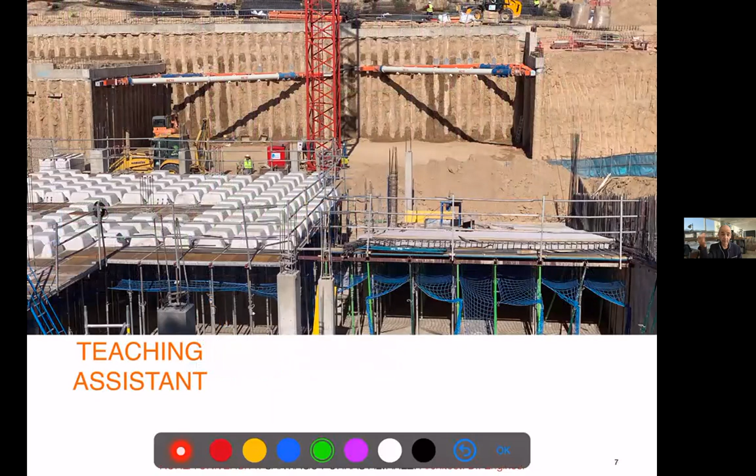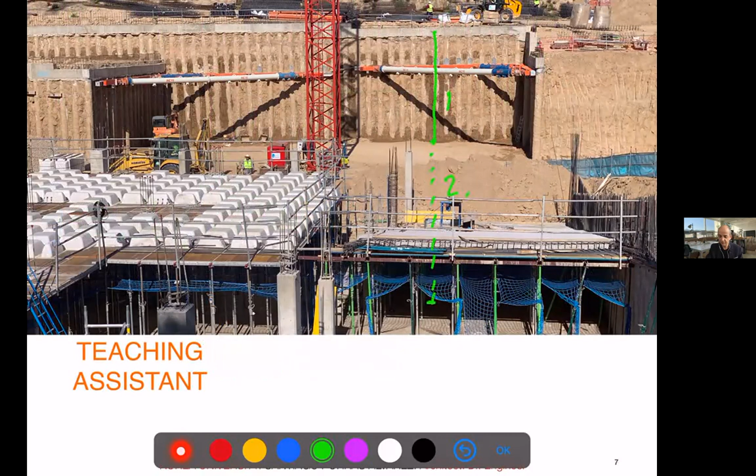Our teaching assistant on the photo shows a construction site in Madrid, which you see a set of piles, which probably go much further - probably it's like a 1:2 proportion, right, to support the excavation. And this is kind of a bracing in diagonal to support those walls during the excavation. And this is a waffle slab just being prepared.

And somebody's coming to the door. Chang Jae-jun, nice name. I think he came in. So still 2 people missing from the class. Jae-jun, welcome to the class. Please try to be on time next time.

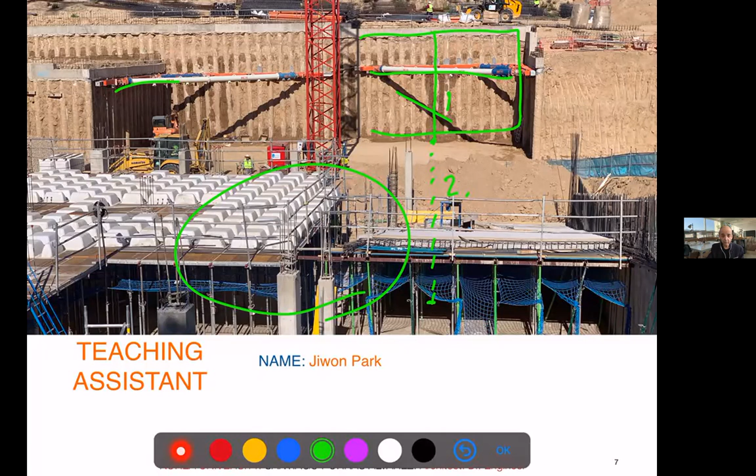Welcome to the class. So our teaching assistant is Jiwon Park, or Park Jiwon, a very able student in the laboratory of Professor Lee Kwan-ho. And you have her email and telephone number. So for any kind of administration, attendance, paperwork, and things like that not purely related to the lessons, you can contact her and she will be very efficient with whichever problem you have.

So let's go straight into the course. What do you want to do out of this? So the course has like 2 phases. Not surprisingly, we have a theory basis, right, which is mostly a review. And I'm sorry to say we are 5th year, but we are very much in the basics yet.

To go into advanced things, we will try to build over what we saw in materials, of course, and it is the same professor teaching the same subject, so there's some kind of overlap that's unavoidable. But we will try to go 1 step further, right, into difficulty, into complexity, but whatever is a review.

And this is a theory course in principle, so it's not hard to understand. But I think more important is the practical side. Ideally, this should be kind of a studio of designing architectural systems, or really applying them to your project, to your design. Well, I would say more like integrating, which is the word we now use, right? Integrating. But of course, we already have a lot of effort in Design Studio, so we cannot go so far. But ideally, this is a complement to your Design Studio, like a support course, right?

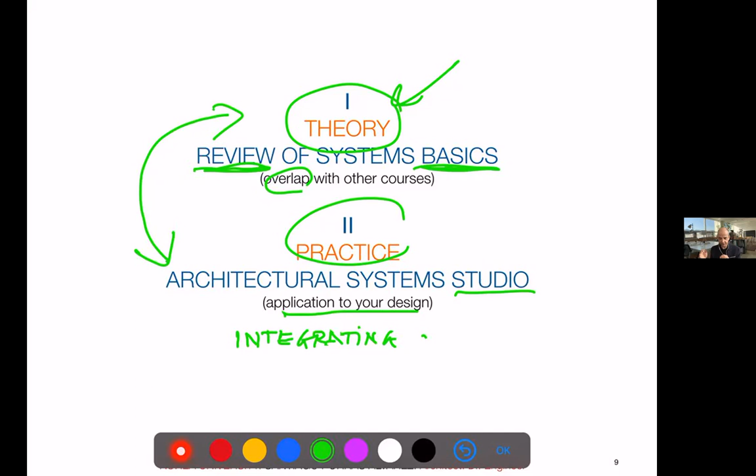And if we are not able to see the connection between design and that theory, we are wasting our time. So more important than really acquiring more data, more information, is having that mental process of connecting that theory with your own design process, right? And when I speak of process, I mean the whole process, from concept to the end - not just something you add, which is the opposite of integrating, right? Like add-ons, which is the most usual.

If this is clear, I hope. If it is not, you can put all the questions you want in the chat. Usually if the questions are on point - I saw somebody just saying sorry, that's okay, I accept it - don't worry, it's the first class and we have to warm up. But any question which goes in the chat and is on point, I'll try to explain on the go. So I said, if you understand this, we don't need to continue with the class. But since we still have 1 hour left, let's continue.

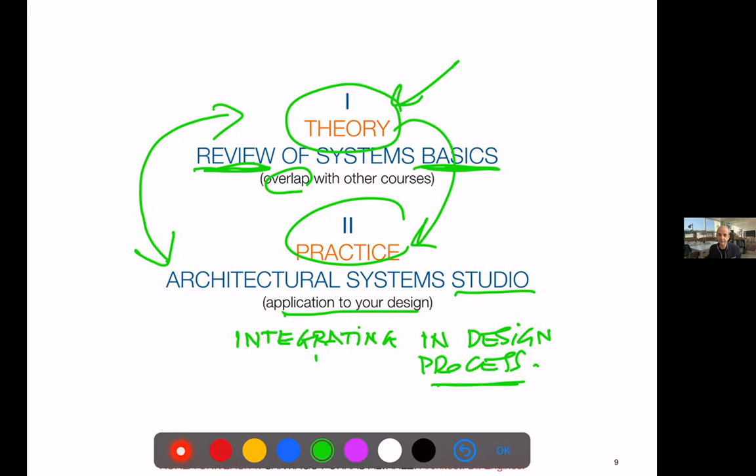Theory is mostly in the books, right, and these are really old books, important ones. Magazines, internet, right, all together, not just internet. That talk that everything is on the internet so far is kind of a myth. It's not true - there are many things which are not yet there, and they're pretty disorganized. So books are the first reference. Internet is mostly about bits of information, not really knowledge.

So except for those few events in which you can make one pavilion or do some internship, in architecture school we have almost no practice, which is a big problem. And practice is not making the project - practice means making the building, which we cannot do.

Compare architecture with medical school, for example. In medical school, you go to hospital and participate in patient treatment, diagnosis, and even surgery - you get trained in the real battlefield. If you go to art school, you make your paintings, real sculptures. So you finish the object.

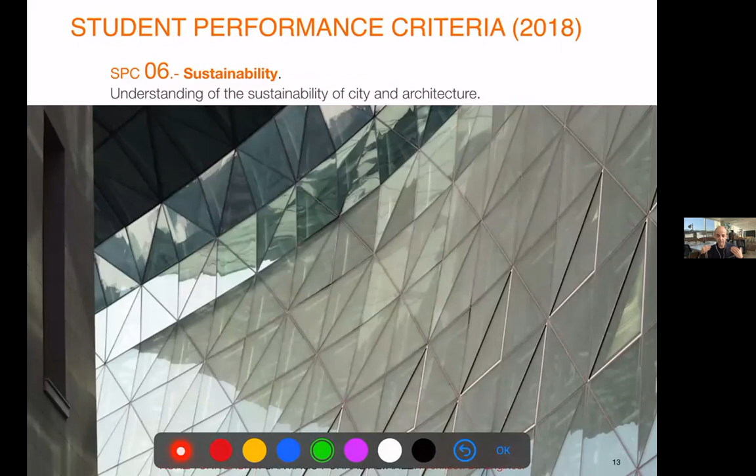And we have sustainability, which is important. It's a bit sad that our department still takes sustainability as something kind of a side subject, not really important - that is changing, of course. But right now, sustainability is something we don't only apply to architecture - it's something everybody expects we expand to our full spectrum of life. We have to live sustainably, in a sustainable way, I mean.

And any competition, and most clients, will demand that to be part of your project. So within the limitations we have, we have to address this issue.

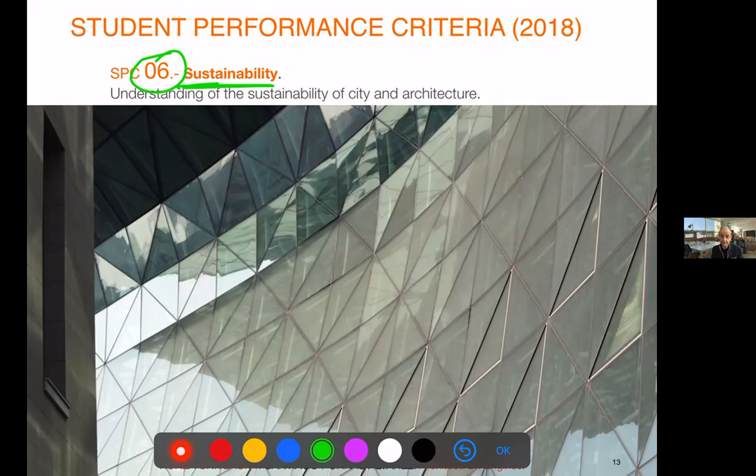System integration - probably the core. The integration, as I said, is the key word. Just to make sure those technical systems are a natural part of the project, as in our body - our bones, our insides, our muscles and our skin are a natural part of our body. It's not something we have like an orthopedic exoskeleton or things like that. And unfortunately, this is not always the case.

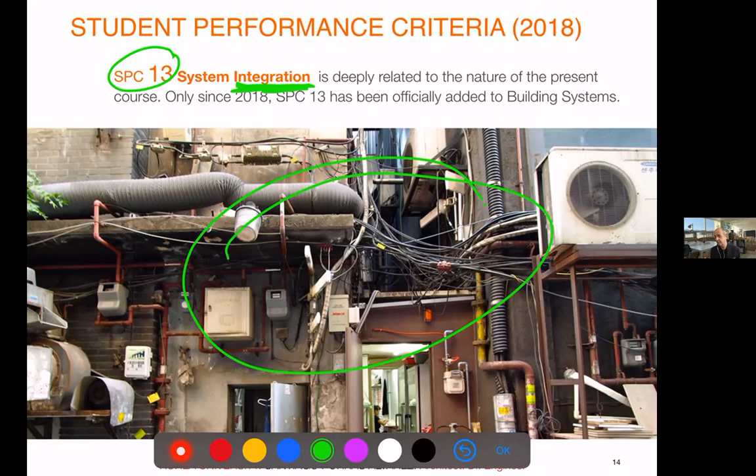Well, this photo is extreme. This is some back street in the Jongno area. It's just the opposite of integration, just applying things in a way that it's a miracle there's no disaster happening there, because many things are against the basic rules of safety.

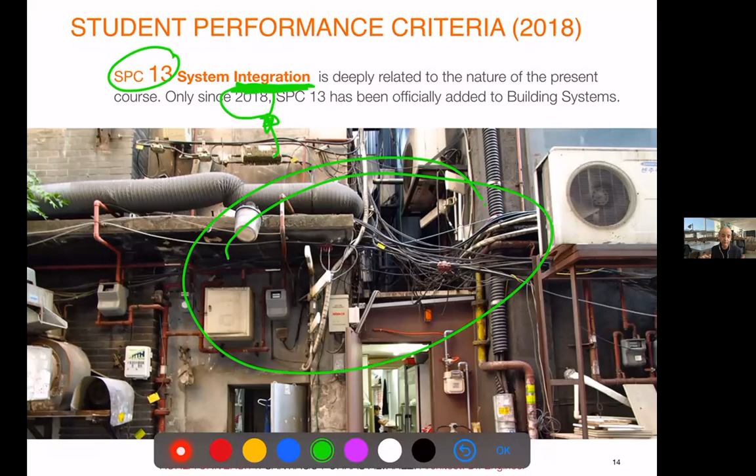Curiously, this being the core of the course, I was able to convince the department to include this SPC, which for me was kind of obvious. Structural system, nothing to explain, that's obvious, we need the structures. In the photo, you have the structure of a Lotte department store next to the Lotte New World Tower.

We will not go into the theories because we don't have time. It is not a course on structures. We will try to be more specific on how they are applied to design, what kind of understanding, what kind of decisions you can take in terms of designing the structure to fit your project, not to fight with your project. Often we make a project, and that happens to everybody.

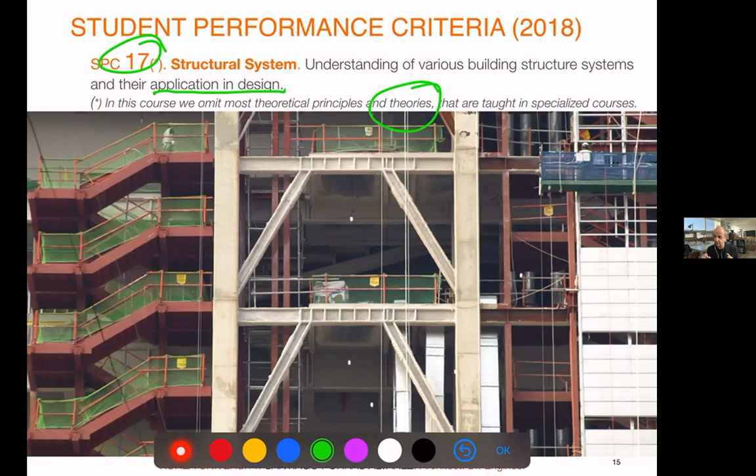And then we have to think about the structure and things are destroyed. This happens because of that lack of integration, that lack of inclusion of that concept from the beginning of the design process. Environmental control systems.

We often forget about light because we have artificial light, and sound because some people say architects must be deaf, as we don't take acoustics into consideration. Whatever, environmental control is obviously one part of the technical systems.

The first and most important element to control this environment, this first barrier, is the envelope, right? The facade, the roof. This is why we will spend a lot of time on that envelope part, because then the active systems, which is the next SPC, the service systems, is something we apply afterwards just to complement what the passive systems cannot guarantee.

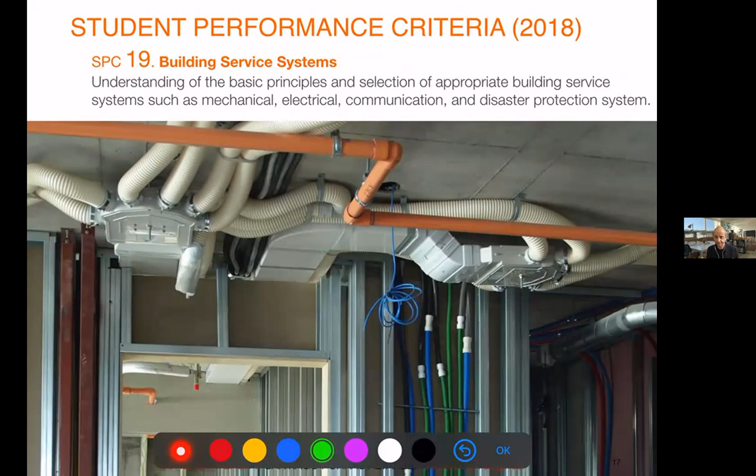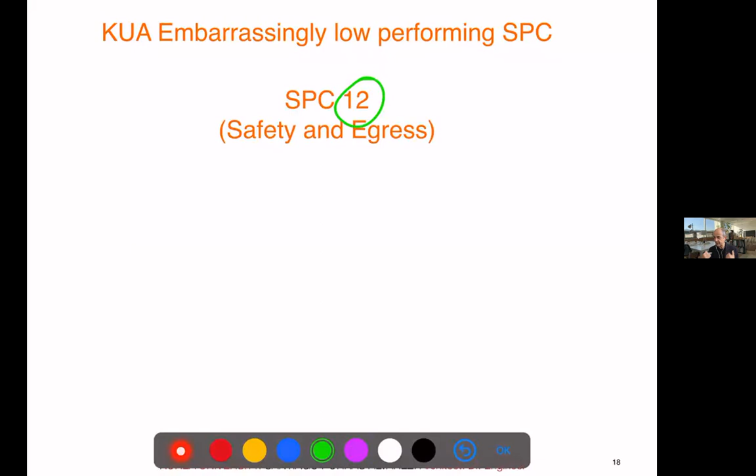Next semester is accreditation inspection, so we have to be careful with the low performing SPCs, of which two affect our course. One is 12, which is not specifically included but it's part of safety, part of the service systems, you could say. I will not translate.

Most of the class are fluent in Korean, so apologies to our exchange student. We have one exchange student, I didn't check the list. Probably logged in, I'm just checking, but too many names. Okay, can't say. Whatever. Yes, Angela. Okay, Angela, welcome.

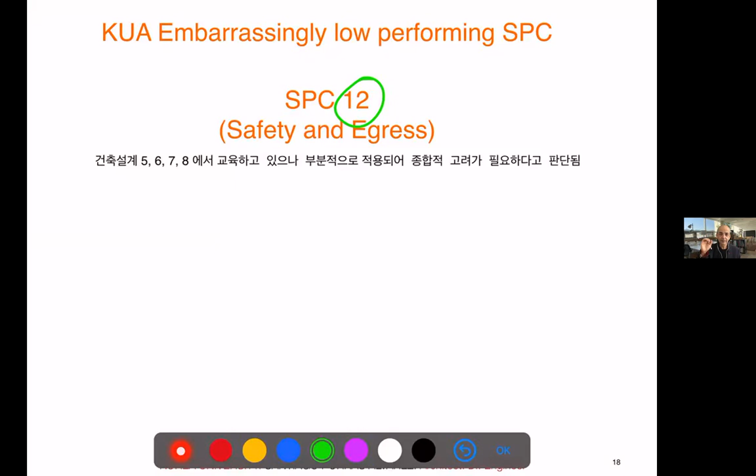So that means safety is not seriously carried on. The other one is building systems integration. This is why I insisted so much to be conscious, to be aware of this SPC, in which they say, okay, it is apparently well taught in this course, but not seriously applied in design, I guess.

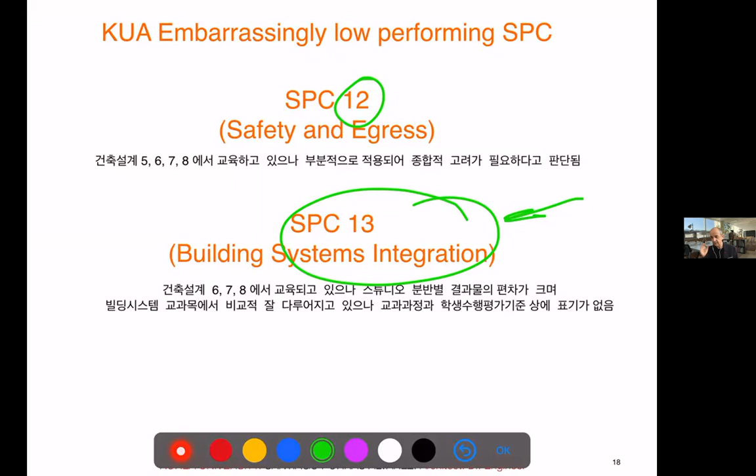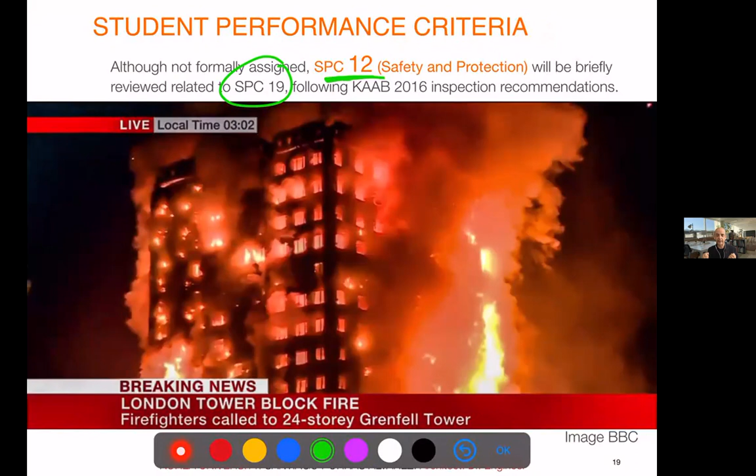And I will call attention to SPC 12, safety and protection. I'll make it brief, but we've failed at that so many times. As architects, and not only as architects but as human beings, spending most of our life in buildings and towers, especially here in Korea where high-rise is so pervasive, designing correctly may avoid many of those disasters.

It's the famous Grenfell Tower in Chelsea, where many people died because of bad design, bad safety planning, bad material choice, and unfortunately people didn't know very well what to do, right? But there was a huge responsibility of the people planning and designing those buildings in this kind of disaster.

Disasters happen more often than you may think. If you go to the homepage of the Seoul Firemen or Seoul Fire Protection Organization, fires in Seoul number in the thousands per year, several per day, right? Some of them are disastrous.

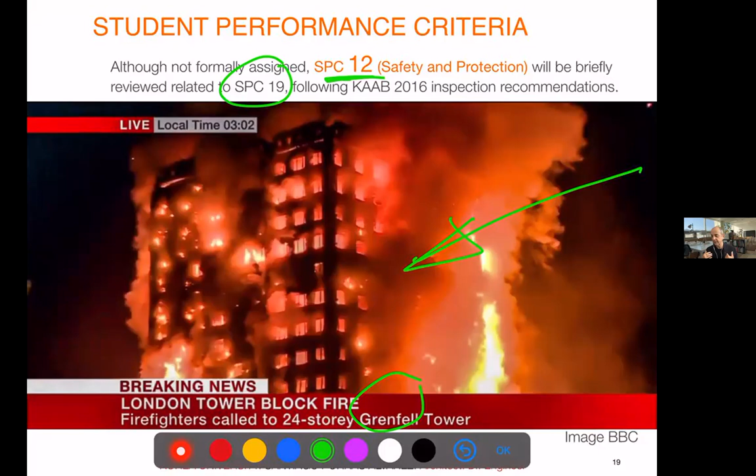Even if you do not design buildings, as a user you have to be aware of safety, so you may use your building in a safe way, right?

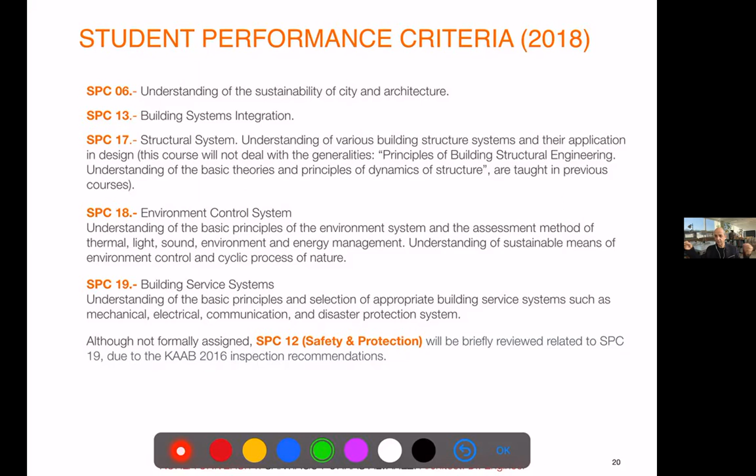Let's continue. That is the summary of the SPCs, which means we are related to 6 SPCs, out of a full spectrum of just 26, which is a lot for just one theory course. This demonstrates the summarizing and reviewing character of this course. It is crazy to think we can teach, and you can learn from zero, all those basics, but it is quite realistic. You can review and organize better in your mind those bits of information you already got in other courses.

I know we are very critical about the SPCs, and this is one critique, not my own words, but listening to you. This is too much to do in one course, and it's too late because we're ending. My reply is yes, I agree. I didn't invent this course, but it is true it's supposed to be a review. So I insist, thinking you know the basics, even if you forgot, whatever you studied once, it's very easy to recover with some basic reviewing. So it's basically a review.

The basics, anybody expects those from anyone who studied a 5-year long program. Still, some schools, especially Japanese schools, which produce Pritzker prizes and top architects all the time. Even though many people like to think Japan is in decadence, in terms of architecture they're still a reference country. Mostly they study 4 years, and they are quite competent in both design, drawing, graphics, and technical things. Anybody expects that, and if we study 5 years, people expect more.

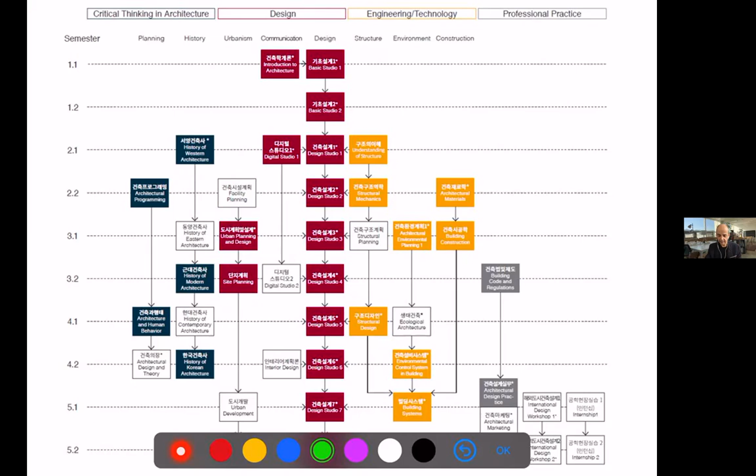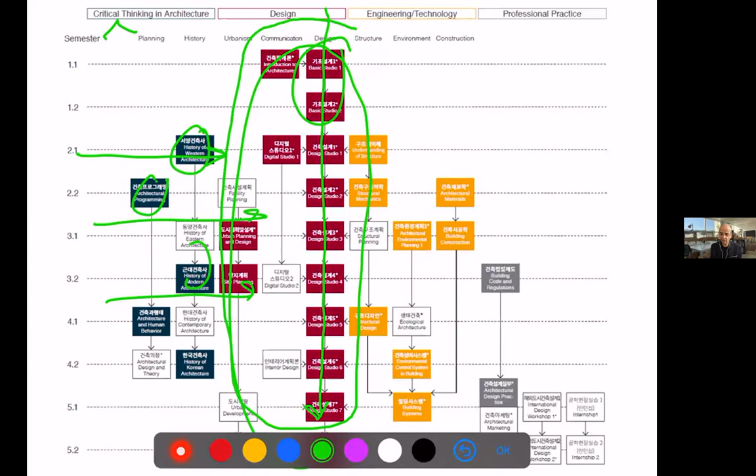Those Korea University Crimson Color courses are all the design studios, which are all correlative. We have a total of 8 studios, including the first year basic studios. They have two kinds of course supporting in theory: one is typically called critical thinking, mostly history, urban planning, which should be more on the design side. Then all the technical courses on the other side. Finally in later years, some complement for professional practice, which some of you had before this class, the architectural design and practice class.

Which I think starts at 9, so probably you're already tired. We'll try not to spend too much time on this. So building systems is exactly this course, right?

We have all the structure courses, 3 mandatory courses on structures, which means right now you should be experts. Building systems just collects all that knowledge. You have all the environmental planning, which is Professor Lee Van Ho, and this is where we treat environment. Then we have architectural materials and building construction, which for what I understand is mostly management.

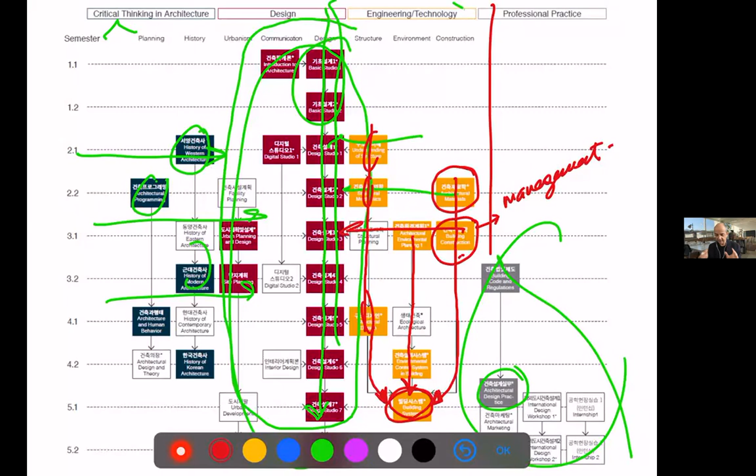I wouldn't do it that way, but okay, that's the school. I think if it's only management it should go into professional practice. So this course doesn't teach much about how to build things in terms of design as applied to the project. But whatever, all architectural materials and construction comes into the building system. So building systems is kind of a funnel, a course which collects and reviews all the technical things which do not happen in any other course. This is the only kind of node, together with Studio 8, at the end of school, which is collecting everything you learned.

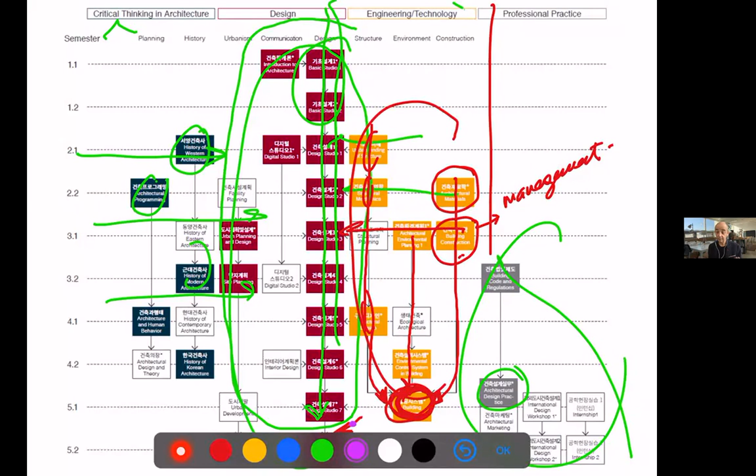This is why this course is so much at the end, and why it is so diverse and so complex in some way.

I will go fast into the syllabus, and please be aware that the syllabus is provisional. Year after year, the lesson numbers and lectures change a little bit, but the contents are mostly the same. Some years we have some difficulty in some areas and some go smoother, so there's more variation, but whatever.

We have the first week, which is this week, today and tomorrow, with the introduction and lecture 1 tomorrow. It's mostly about the systems, the architect, and the engineers, to give some context to the lectures we'll see later.

Next week we will go into structures, which will last at least 2 weeks. Then you see this sign, in case we have, for whichever reason, to keep online, which I wish is not the case. If we go online, the exam is divided into smaller bits because online exams are very cumbersome to do. If not, there's no reason we shouldn't make the traditional long, beautiful exam on paper by hand, as always, in a classroom where we can see each other, where the ways of cheating and preventing cheating are different than online, so probably a bit more relaxed than online.

We will spend at least 4 weeks with envelope systems. It's not that they are more important—structures are essential because without structures, buildings collapse, and it's not nice, we've had many news of collapses in recent months. But the envelope is really the basic element which protects us from the exterior, gives the image we design with care, but also creates the interior environment we want.

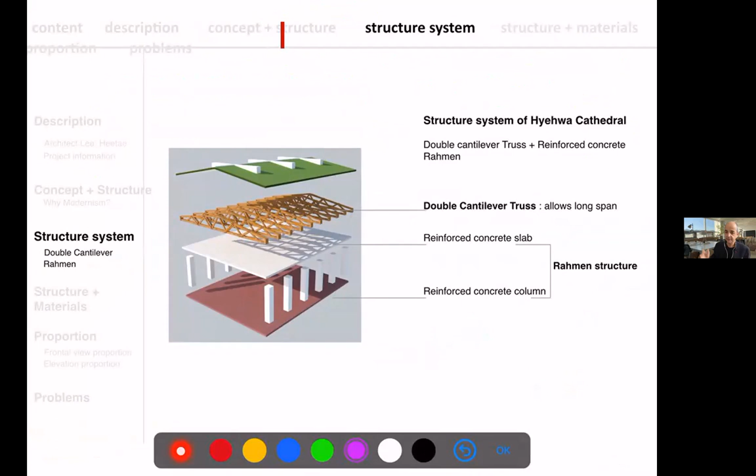So that's the point. Probably 4 assignments before midterm and 4 assignments after. This is like one assignment every roughly 2 weeks. These are examples of assignments Yoson did. Structure, this was about analyzing buildings. We don't do that anymore because of Corona, it was hard to make and organize those things. But okay, this is taking existing buildings and trying to explain how the structure works or how the envelope works, right? This case was Hyehwa Cathedral.

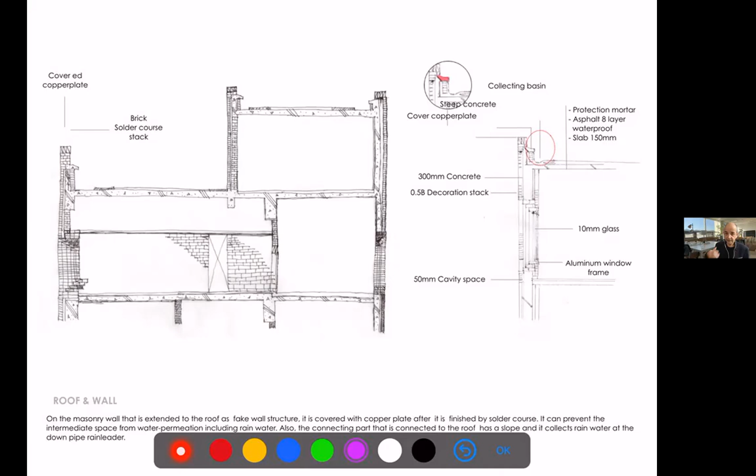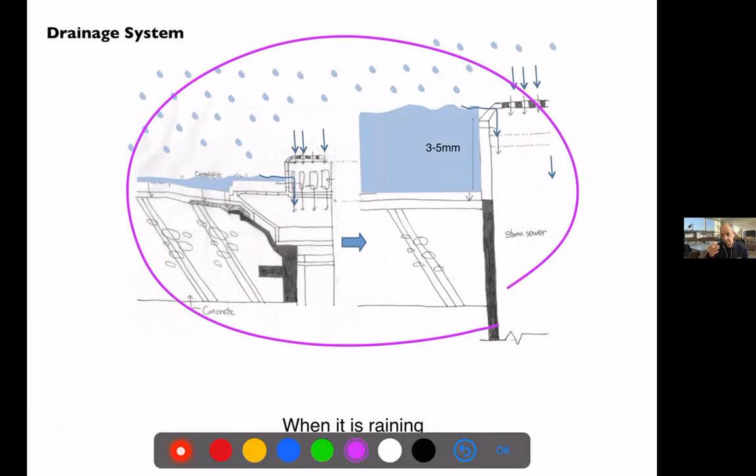Recovering details from publications, imagining them because you don't have all the information, and finding the strategies to show it in a clear way, more or less, right? And imagining this is a guess, because we don't have so much detail from existing buildings. So you have to go to your notes, reference materials, and try to guess which is the correct water drainage, flat roof there, right?

Most important, I think, is assignment 2, application in the student's design. And this is totally individual. All assignments will be individual this semester. We will not make those complicated analyses. They were interesting, but we have the time we have and the energy we have.

But this is most important, and I wish this would be the core. Actually, if you add the score for those 4 assignments week by week, plus the final presentation, it's a big percentage of the course. Most important.

And the illustration is from one student who had always very not great scores in design. He really did not enjoy design, didn't understand why those drawings and those things made sense. But when he was asked to make the 1 to 50 model dealing with the details of the envelope structure and how the spaces are, he was so engaged, so hooked, because he could see things closer to the reality, that he became one model student. He became one of the top 10% of the school. He was able to study abroad, to have a nice result in graduate school, and work now in a nice office in the States, I think.

Everybody has different abilities, but sometimes you discover what design, what architecture is about when you go beyond the abstraction of those very basic diagrams and fancy renderings, which are just one image of the outside, not really architecture. The important thing is seeing how people try to integrate the structure, like in this real project where students see how to put the structure.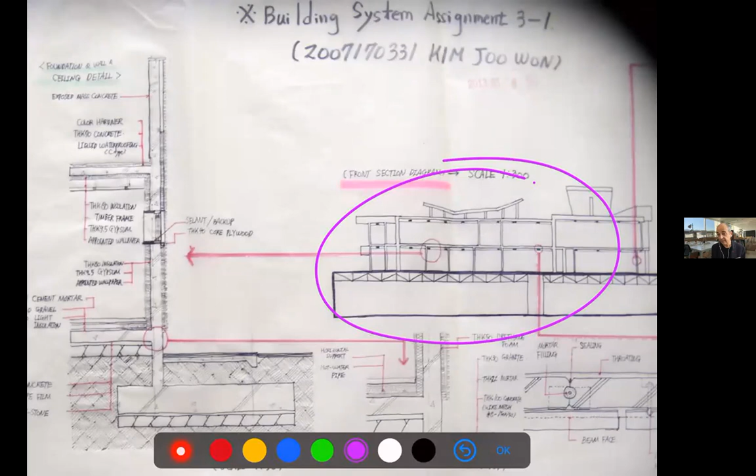One difficulty most of you have is separating structure from envelope and other things. So when you design a structure, you think about the structure alone, right? In 2D dimension, and so on. So you see issues which do not work.

All this red is my feedback. All those are elements which I don't understand what you are doing, what you are showing, or why things happen in some way, or an issue you should fix, how to add clarity, and things like that.

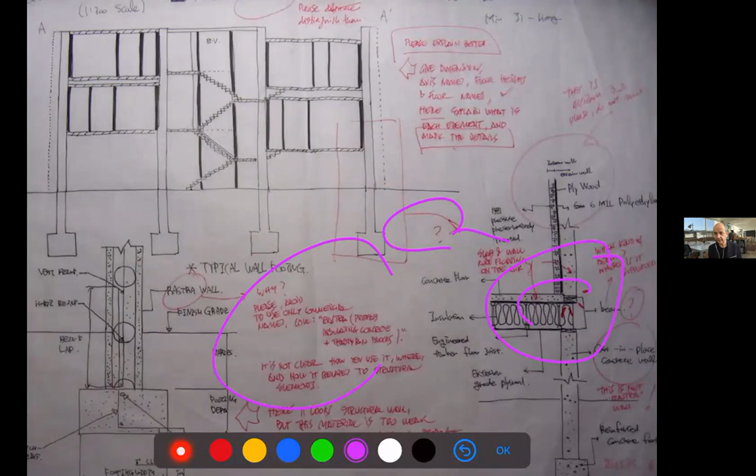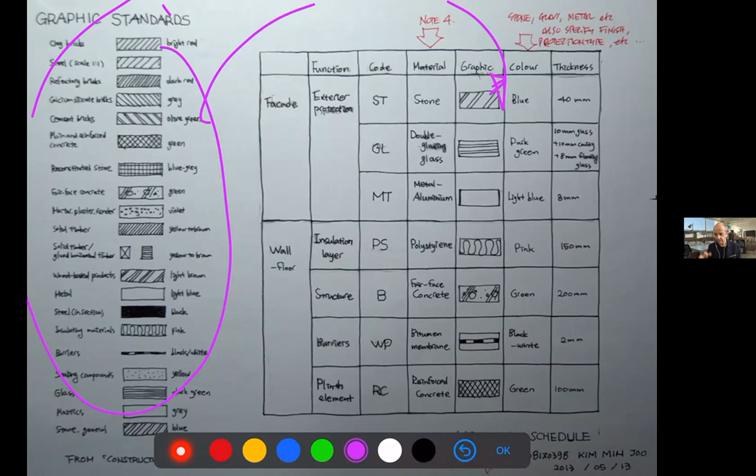Envelope is most important, and this is about graphic standards. By the way, if you make the full list of standards, you don't need to repeat it. As we said, the assignments are by hand - well, we'll say more later - but working by hand, you have to be economical. You don't repeat things, you do them once. But it's nice about collecting what we call a material schedule, or material matrix, or table, about what you use in the building, to systematize and see how one drawing of a glass box in cantilever for one building could work in reality to be built.

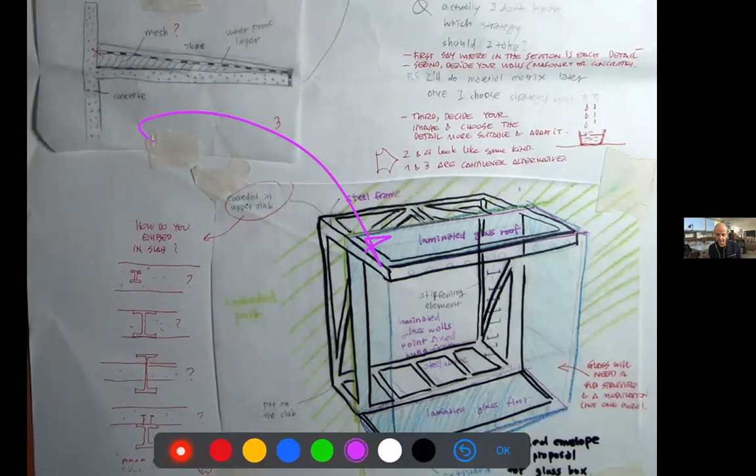MEP is the hardest for most, and hard to understand how it relates to design. I show this because I've seen this about 100 times already. You have not to be confused - this is not about making some drawings to show and to look nice.

Of course, everything you do should look nice, at least clear, so we can understand, and tidy. But copying a very complex drawing from one book - this is obviously copied from somewhere, and just putting it - I have this diagram for office building, for house building, for a commercial building, which doesn't make sense at all.

And even so, the elements are not properly copied. This is clearly a ventilation duct - it is not a plumbing system. And this is not electricity, it's clearly a drainage pipe. You can see from far away. This is not the project, this is one issue, and it's not even properly copied. This is mostly useless, time consuming, and you learn very little or nothing. So it's not about this.

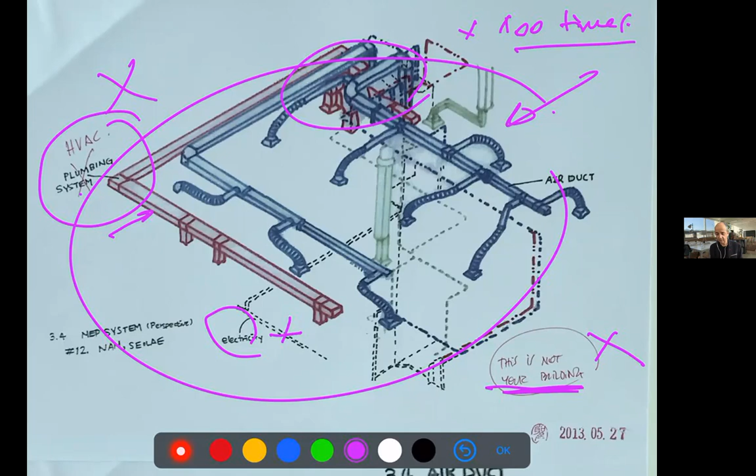It's about using hand drawing just to think, to organize how those elements can be applied in your building. This diagram is correct in itself - it's published, so it works - but it's not about copying it. It's about seeing how you can put it in your project and how this will affect the design, because those elements will take a space. You will need a shaft, you will need a suspended ceiling height. Those elements will show in the ceiling, and in the ceiling you may have lights and some kind of design. So all those things you have to take into account. It's not about just copying something which looks nice.

This is most the case. Since you are working on your project, and this is quite correct, you print the floor plan and then you work by hand. You try to guess where to put the shafts, how to collect the ducts, and how to organize it. You do it by hand because you think faster. In the computer, you have to go to the final. When you know how things work, you can go to the computer. Computers ask for precision, for exactitude, and if you have to be precise, it is very hard to think, and you have to think how to put the ducts, which doesn't work very well.

But okay, you don't need to spend time redrawing the whole floor plan every time you try to do something - this is what some people do, and then they say this course is terrible because I spent so much time with assignments. But actually you need to spend just what is necessary, as you would in your office when trying to plan things to bring to the engineer and agree how to organize it. Otherwise, the engineer will not listen to you, will put the pipes and ducts where he wants, and you have a mess because it doesn't fit the project at all. Engineers do not worry at all about the design concept or design.

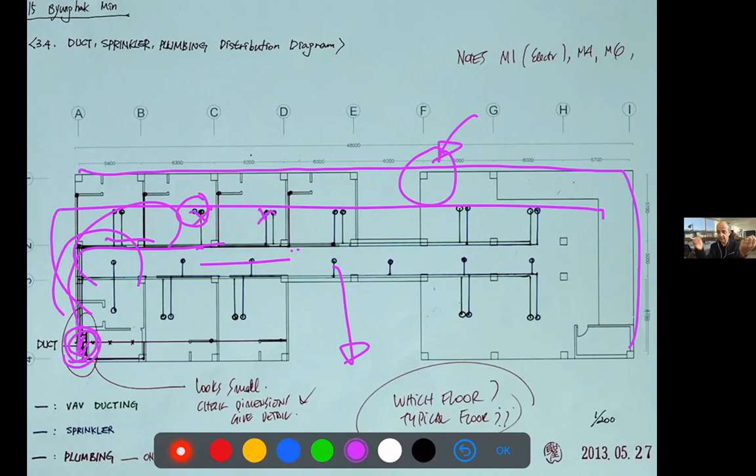This is also overdone. This could be a presentation drawing, but when you work with small buildings, you have to detail more, right? And here you see things. Obviously, you will not put a duct crossing an elevator, because the elevator will crash every time it goes up and down. This is basic stuff you have to understand. This is the meaning of this kind of exercise, and then how you make the shaft correctly.

So you should have access from the common spaces, not from the houses. And there are pipes which are almost impossible to access. So when you design a shaft, you have to think about the people using it.

But still, this is something that at least helps you understand that part is important, affects design, affects the interior spaces, affects the structure of course. And you need some kind of logic. And it's better that you, as an architect, control that logic than having a bunch of people doing their own way and having a small disaster in the building.

Think that you're one, right? Or the architecture office is one entity, but you will have the ventilation guys, the water plumbing guys, the elevator guys, the lighting guys, the interior guys. They're all different. Construction sites sometimes are like a kind of war, every subcontractor, every engineer fighting for their own territory.

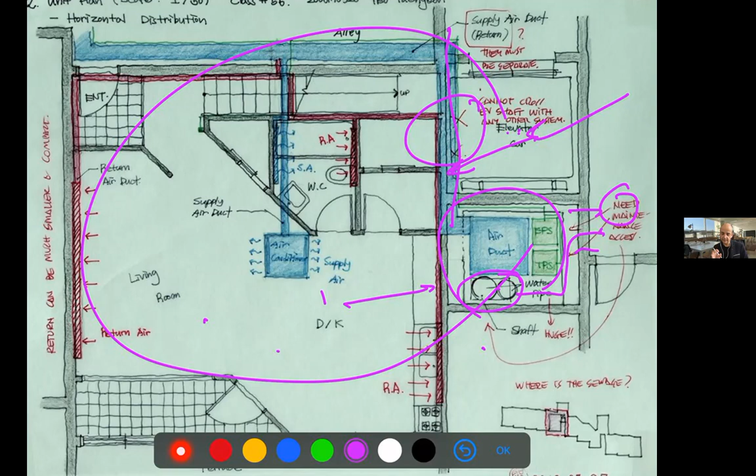Sustainability and integration usually work in diagrams. So integration means mostly showing in a section all the systems. So you will show the structure, how it relates to the envelope, how you include the shafts or the pipes of ventilation, how you collect the water, and so on.

So all the systems, we started by separating into different assignments. Now we put them together, we can show that they work well, they do not clash with the design, and they kind of work smoothly, and in the end have a nice project. This is rotated, right? This was kind of A1 size, a very large section.

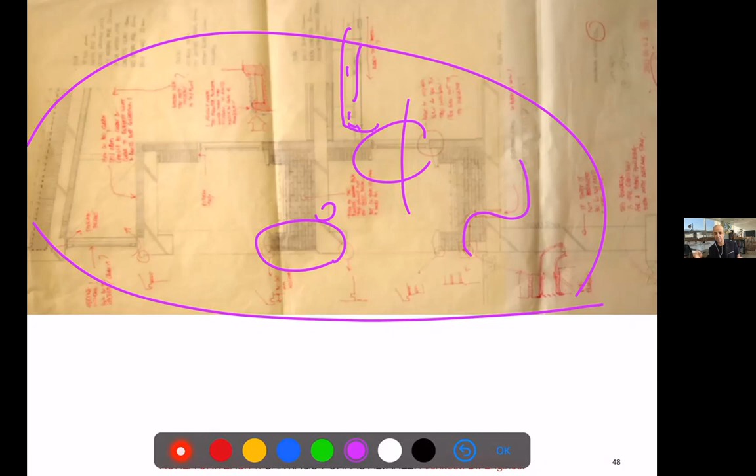Sometimes it's okay if you copy details. This is obviously, or probably, copied from somewhere, but it's applied to the specific project, and it doesn't work completely. So there are many issues which the student should have worked on.

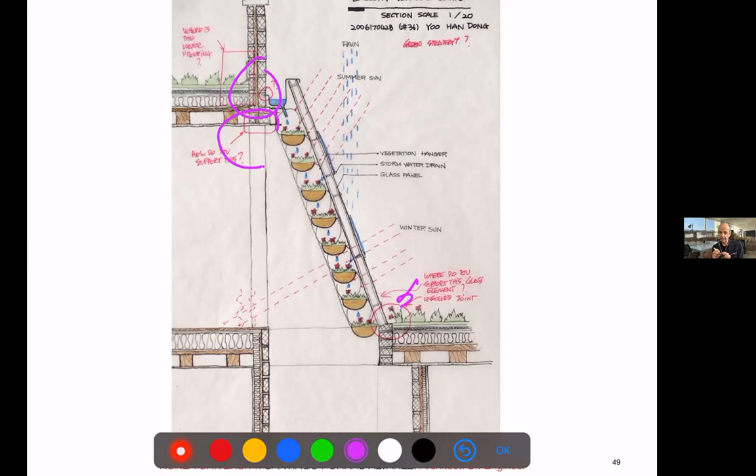This is okay for a final presentation, not for week by week, but it is nice to see people doing things with care, and really, obviously in this case, enjoying what they are doing and being clear. Then the technical things can be corrected and improved, which this student did at the end.

Integration diagrams, this is one tool we study at the end of the course. And then that's it, I did not show final assignments. I will do that later, after midterm, so you have a reference on what is the best, the basic, and the lowest performance. But right now it's more about the concept, the idea, the purpose of this course.

As a reference, we have our old loved book by Andrea Deplazes, Constructing Architecture: Materials, Processes, Structures, a handbook. This is the same book we used in materials in second year. I myself used the second edition, 2008, in English. The original is German.

You have a translation in Korean of the first edition. I heard the translation is terrible. German is a difficult language to translate, even into English, and I can see many difficult translations, which I'll comment on in due time. Probably in Korean it's even more difficult, but whatever. You have the book at the library, I think the department's library, and probably also in the science library on our campus. We also have plenty of copies in English, and even newer editions available.

So what is good about this book? It is very practical, and it covers the basics, but the basics are very well organized, and you have plenty of examples to see the endless variations you can get from those basics. So you have real projects and the theory. And it's written by architects who really build, so they show their own projects.

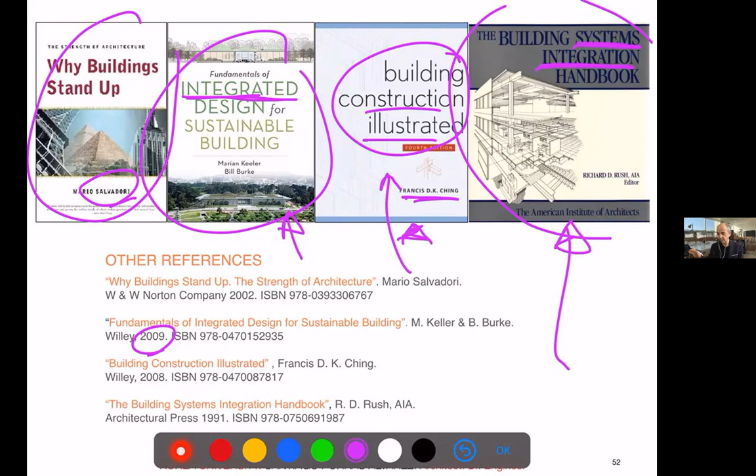but anyhow, it's a very good example of the basic logic. And finally, the Building Systems Integration Handbook is not a book I love especially, but it is in the library. It has a huge amount of information - it's this thick, right? And it's the only serious book about what system integration is about that I found. It's overkill; we will refer to it briefly in some lectures, but this is the basic bibliography I used most commonly.

Let's take this out.

The grading is in the syllabus. So it's like 10% participation, 40% assignments. So you see participation and week-by-week work is half the course. The exam is 25% and the final is 25%. But if you add the final assignment with all the other assignments, 65% of the whole course is on assignments. It's like practical work, it's practicing, right?

And it doesn't need to be overkill, it doesn't need to be too much work. It's 4 assignments, one every 2 weeks. And you will see that you have to think, right? You have to apply things, but this is all for the benefit of your project. The total is 100%, and I always like to have open scores, but in the end they're always private. I don't know why, but I keep them kind of private.

The grading criteria is something that interests people. The relative grading is something which is very much assumed here, and it is quite open. So in general, up to 40% could be A/A+, and then only the lower 10% should necessarily be C+ or lower. I think this works sometimes, but sometimes it's unfair.

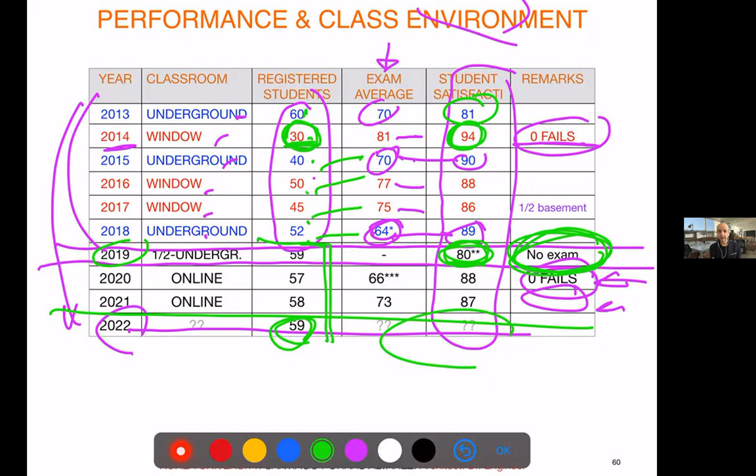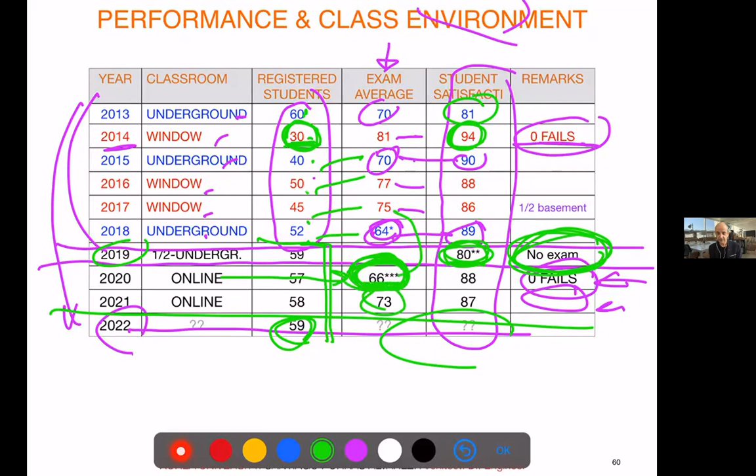Another comment: when the exam average is very low—which is curious, because people think online there's a lot of cheating since you're at home with everything around you—either you're very good at faking difficulty and really cheating, or there's really not so much more cheating online than offline, because the exams weren't so great. If the average of the exam is very low, I raise the averages a little bit, so there isn't such a disaster. This is the relative part of the grading.

I say that because when you design spaces for people, wherever people have to do some activity, it is a good idea to have natural light. It can be top light, windows, natural light. For some reason, our mind works much better with natural light than with the best artificial light in the world. One thing I do not agree with our school is that they keep building classrooms underground, because it's a way to have more efficient use of space.

Just to end, I will go fast into the opinions of your seniors. And you know, for every positive opinion, there's a negative opinion. It is impossible to have everybody happy. So I had, over the years, quite positive comments, and this is something I appreciate.